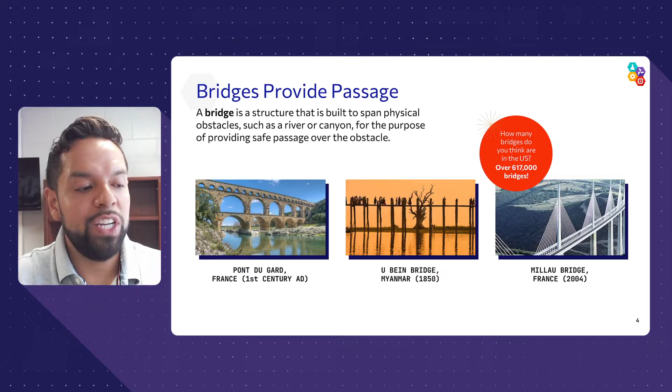Just a quick question, maybe you're thinking or wondering right now: how many bridges do you think there are in the United States? 50, 500, 500,000, a million? How many do you think? If you guess somewhere in the 600,000 range, you would be correct. This is positive for those of you that are planning to be civil or mechanical engineers, because there will always be a job for you.

All of these bridges in the United States have a lifespan, which means that they have to be inspected, they have to be maintained, or they have to be rebuilt.

As I mentioned to you at the beginning, a bridge is much more than a structure. For centuries, communities have been building bridges to make connections that increase opportunity. Rural isolation is still a root cause of poverty today. In some communities, people are cut off from year-round access to education, healthcare, and markets due to the inability to safely traverse some of these rivers or canyons.

So how important are these bridges really? Well, they're so important that in some studies of communities, those with access to bridges earn 30% higher incomes as a result of the increased access to jobs, education, and medicine.

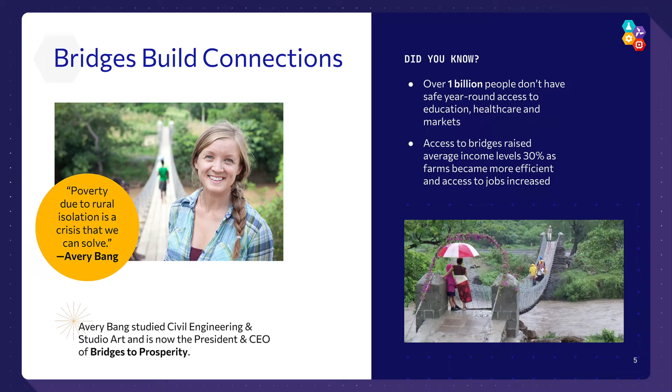One engineer dedicated to solving the problem of rural isolation is Avery Bang. Avery knew she wanted to be an engineer when she was a kid playing with Legos. She went on to study civil engineering and began volunteering building bridges in rural communities when she was in college. She is now the president and CEO of that organization, Bridges to Prosperity.

These bridges are really intricate, but they can be taken and transported. You can take them to different places, roll them out, and provide safe passage for people who've been stranded in the middle of a disaster zone.

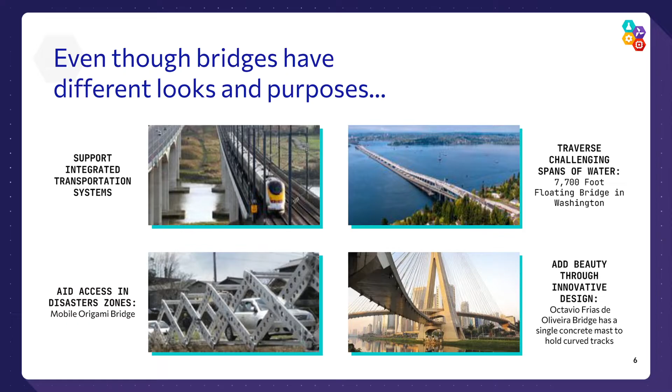Finally, building bridges contributes to the joy of living, regarded almost as much as works of art as they aid in transportation. Care in their design can contribute to a more enjoyable urban environment. Bridges will change the landscape of a city skyline. Here in New York, we just recently had the Kosciuszko Bridge put in, and it totally changes what Brooklyn looks like. So think about that as you're designing your bridge - you may wish that your design is really pleasing to the eye.

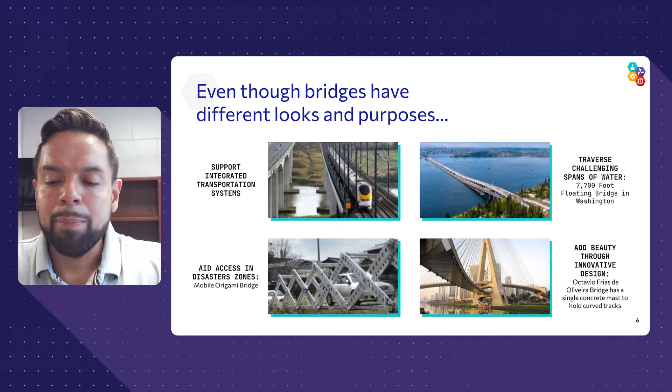Moving on, let's talk a little bit about the fundamentals of bridges. Even though they're all different, it's the interplay between compressive forces and tensile forces. In order to build bridges that will be able to carry the required loads without collapsing, it is important to understand something about stress, strain, and the strength of materials.

Stress is a measurement of force over an area. Compression occurs when something is being squeezed together, while tension occurs when something is being pulled apart. Bridge designers must model the stresses that exist throughout the structure under the most severe conditions, including the heaviest loads and the wildest weather conditions.

Strain is a measurement of how an object reacts to stress. In order to create safe designs, engineers use their understanding of forces, stress, strain, and material properties, including the amount of stress a material can take without permanently deforming or breaking.

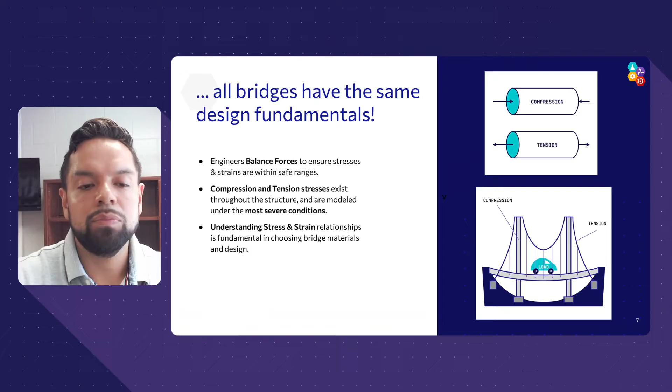There are many bridge designs. Some of them are more popular than others. Virtually all of them work by balancing compressive forces in some places with tensile forces elsewhere. Architects and engineers from the mechanical, civil, structural, and material engineering disciplines work together to choose the design and materials based on a number of constraints, including bridge function and budget.

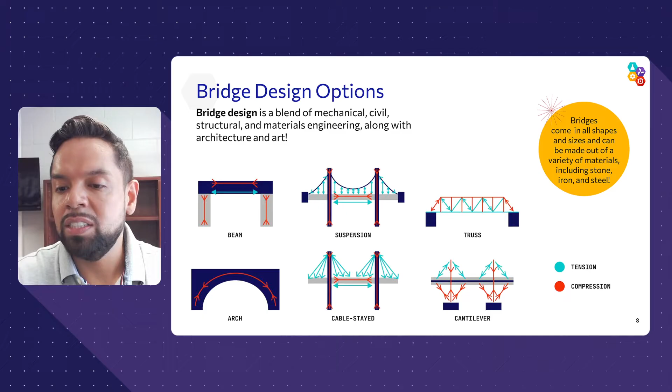I do want to show you something about this. If you notice on this slide, you see a whole bunch of different bridges and different colors. I'd like you to notice that blue is where the tensile forces exist in some of these bridges, and red is where the compressive forces exist.

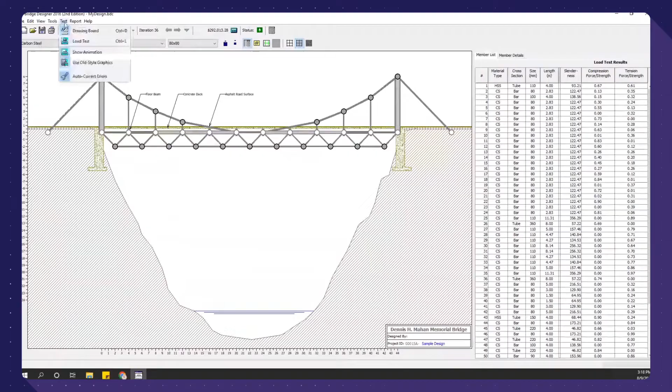I want to show you something I usually use with my students about bridges. You can see here an actual bridge, a sample of a suspension bridge. What you'll notice is that there are two abutments here, and each one of these members carries some kind of load. I'm going to run a test on it to see how it would do during loading. I'll start here and pause it first.

What you see before the truck actually passes is that some of these members already have taken different colors - again, blue means tension, red means compression. The reason why that happens is because the bridge is made up of material, so it already has a dead load to it; it has to support its own weight.

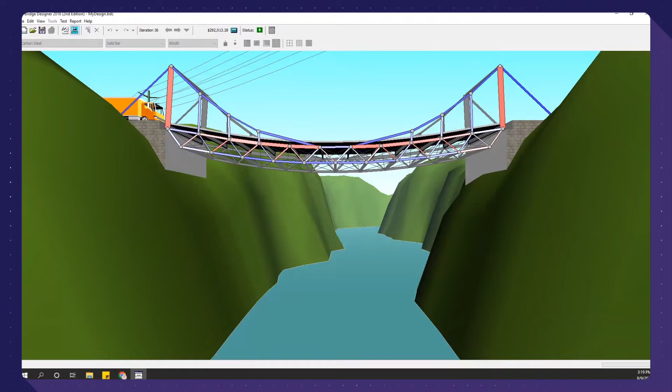Notice that these colors will get darker as the truck passes right over it. You can see all of the stresses on each of those members and how they concentrate as you get an actual load going across it. That load is called a live load.

Engineers work with different types of loads: dead loads, which is what's required to keep the building up by itself, and live loads, which include the crossing of any objects as well as environmental factors. Think about seismic loads with earthquakes, or resonant loads with wind. Wind shear will cause a bridge to move, so all of those things have to be designed for.

All right, maybe you've had a chance to think about it. Let's test it again, so you can see the bridge, and you can immediately see some of its deformity from its own dead load. Some of these members get pinkish red - those are the pieces being compressed, and the blue ones are being pulled apart, or in tension.

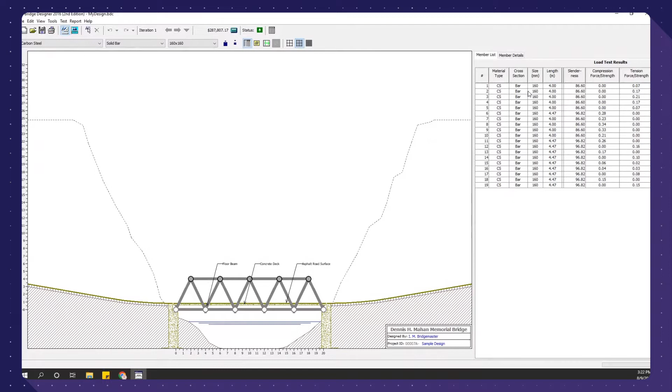Now the other thing you'll notice is that each of these members on the right are made of different materials. We're going to talk about material, but also about the shape of the material, which is really important in understanding how a bridge carries its load. Later in this presentation I'll show you three equations, and you'll understand that each of these is really important - the cross section, the size, the shape of the bar, and also the length.

We'll talk about length because it's very important. Just think about what would happen if one of these members were really, really long instead of a short member. Do you expect that to be stiff, or do you expect that to be flimsy? Something to think about as you go around designing your bridge.

I want to change, just for fun - I've never really done this. Let's see if we could change one of these members. I'm going to change this member you see here. I can probably change its material - let's say right now this is a solid carbon steel bar. If I want to change it, I can make it bigger or smaller. I'm exaggerating the change here because I want you to notice the difference. Now let's test it.

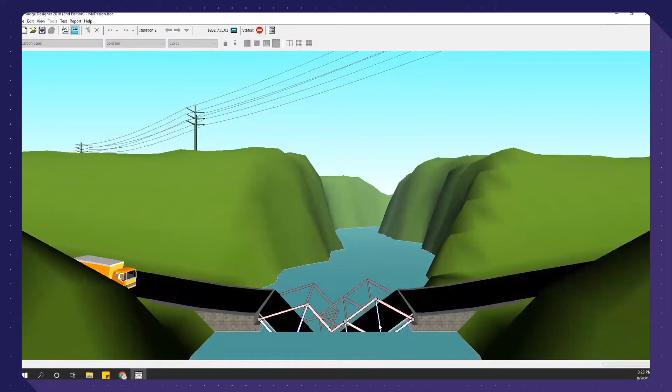As we test it, you'll see immediately that one fails, because we chose a member that was too tiny. Now, why would you want to choose a very flimsy member? Because you want to save money. As I said at the beginning, bridges cost something, so if there's no money in the budget, you may try to take shortcuts. Sometimes they work, but as an engineer you have to know which shortcuts you can and cannot take. This would be unacceptable - this bridge is not functioning.

Let's see if we can fix it - that's my second iteration. Let's go back to the drawing board and change that member again. Notice it has hatches over it now, which just means it's not good. So let's make it a little thicker, say 80 by 80. Notice it's still significantly smaller than the members around it. Let's test that - let's see if it passes. Again, you see it does not work. So back to the drawing board - let's pick something closer to its original size.

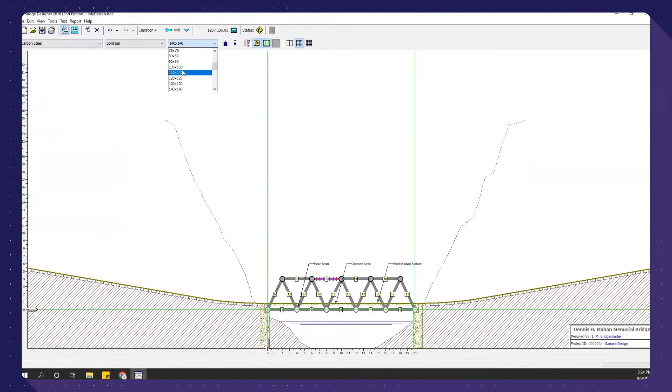Let's do 110, I want to test it again. Here we go. Now you can see that member is being stressed. Hopefully it will take this live load, but it actually does not pass.

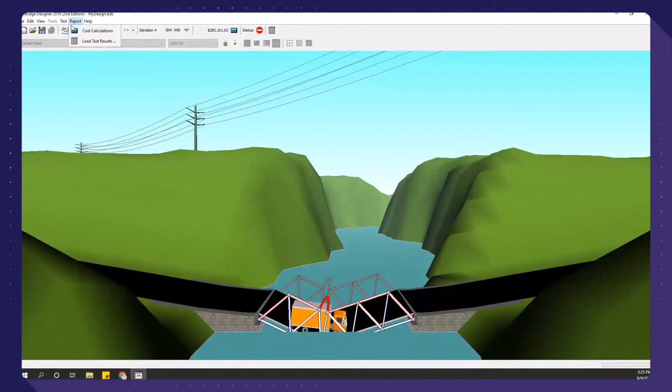This would be a bad thing, not a good thing. Let's try a different number. Let's make this 120, just going up incrementally.

Again, dead load. You can see that member is being stressed. Here comes the live load. Will it pass? Maybe, maybe not. In this case, it actually does pass.

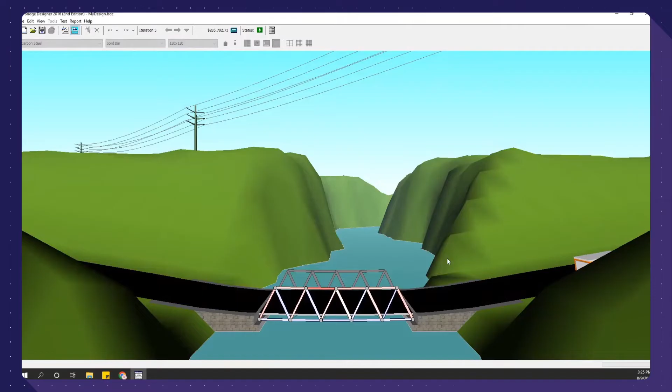If you were in that truck, you'd probably not be happy because that bridge is really moving. This is a case where the bridge is serviceable, meaning it does what it's supposed to do, but people aren't going to want to go on it because they don't feel safe. So even though your bridge is serviceable and functions, sometimes you want to make sure it's strong enough so people feel comfortable on it.

If you've ever stood in the middle of a bridge while walking over it, you'll feel the vibrations. All structures have to move. If structures don't move, they break. Think of something very brittle - it doesn't have a lot of flex, so as you try to bend it, it'll just snap. That's something you don't want.

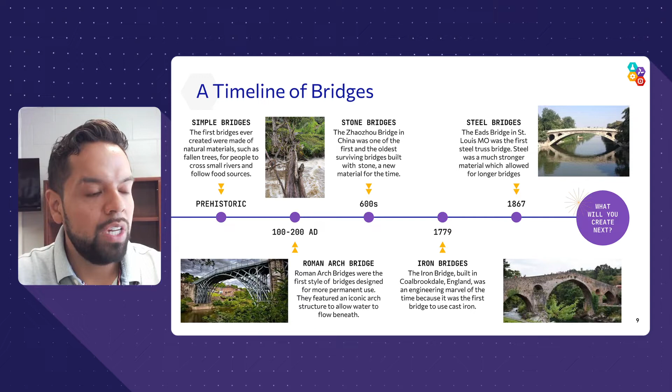What material? Well, steel. Steel was lighter, steel was stronger, and so it allowed us to make really, really large, long bridges. Think of the San Francisco Golden Gate Bridge - that has a lot of steel in it. All of these bridges made with steel are able to span longer canyons, rivers, obstacles, and so steel became the material for bridges.

So what will you create next? Let's think about that. A quick recap of everything we've spoken about today: bridge designs depend on function, location, material, and budget. Bridges work by balancing compressive and tensile forces, and bridges are designed and built using the engineering design process.

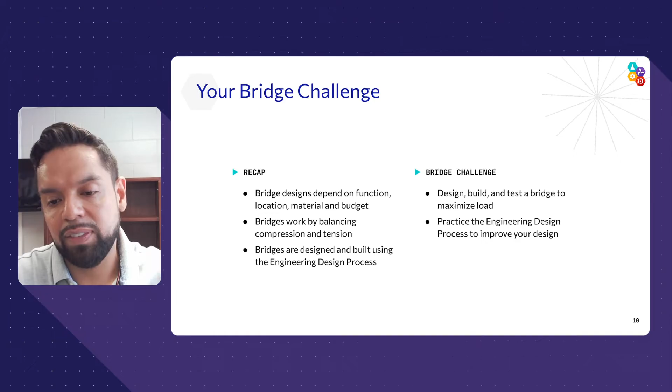Today's bridge challenge will ask you to design, build, and test a bridge to maximize load and do it cost effectively. And you'll get to practice the engineering design process to improve your design.

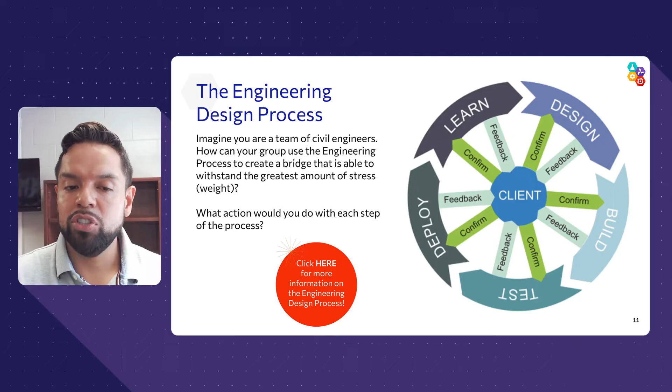Some of you may be asking, what is this engineering design process? It's an iterative process where you do something over and over again. You start by learning, creating a design, building it, testing it, making changes based on your testing, and then deploying it and doing it over and over again. Iterations - almost like what I was doing with the bridge designer. It took me several iterations, changed it a couple of times.

So what we want you to do today is imagine you're a team of civil engineers, and we want your group to use the engineering process to create a bridge that is able to withstand the greatest amount of stress and weight.

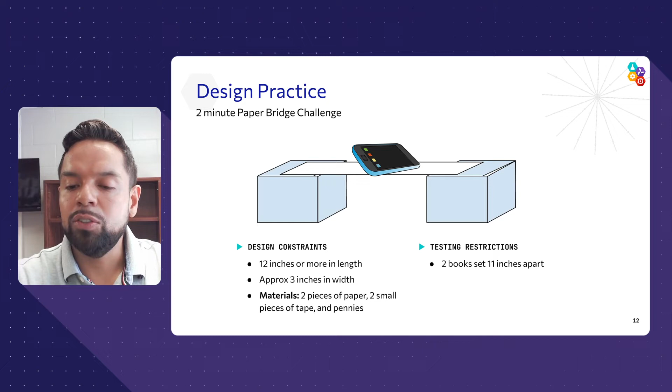We're going to take 2 minutes for you to practice a little bit. Take out a piece of paper, 12 inches or more in length, approximately 3 inches wide, and make a simple bridge. Your constraints are very simple: maybe 2 pieces of paper, no more, 2 small pieces of tape, maybe some pennies so you can load up on it. In my example, I've loaded up an iPhone, but that's not what we want - throw some pennies in there. Make sure that you're testing your bridge by putting 2 books underneath it that are 11 inches apart.

Think about what shape you want your piece of paper to be. Is it ideal for it to be flat? Do you want it to have some other shape? Should I roll it? Think about different things you can do to that piece of paper to fortify it, make it stronger - change its shape. Because as you remember, shape is important for each of these members.

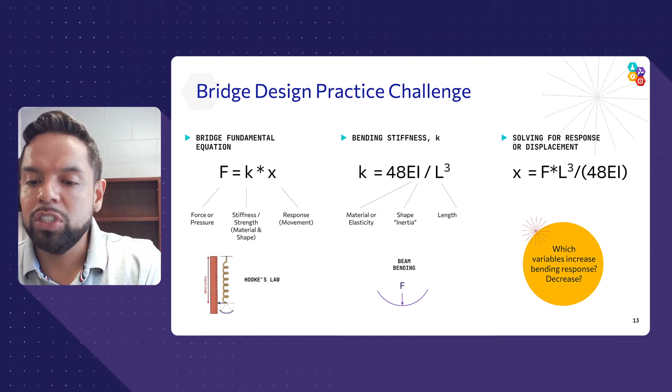So length also plays a role in this. If I put it together and solve for X, all I did was take this K, this huge equation, and plug it right in there. I think what everyone needs to notice is that in this last equation, the deflection is directly proportional to the length cubed. That means you don't want long members, because when you increase the length, there's a cube factor, and that's going to change the deflection.

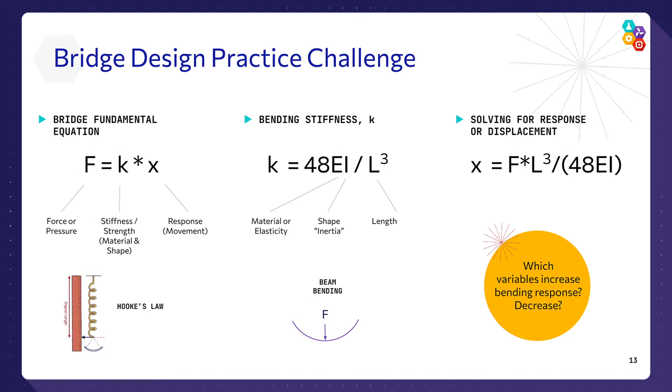That's why you want short members. You don't need to know this equation exactly, just think about the piece of paper you used before. If you had it long, it's flimsy, but if you shorten it, it has a little bit more stiffness in it. Something to think about.

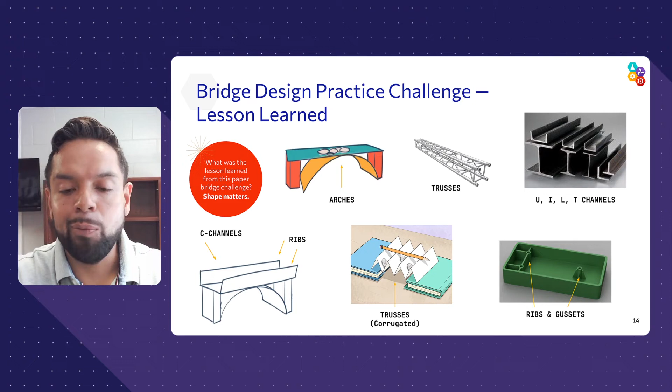As you start to build your bridge from our engineering kit, I want you to think about all of these things because they do come into play. So a little bit of lab overview. What are you doing? Now comes the fun part, the challenge. You're going to identify the problem. What is your problem today? Your problem is that you will be building a cost-effective bridge that can carry a lot of load.

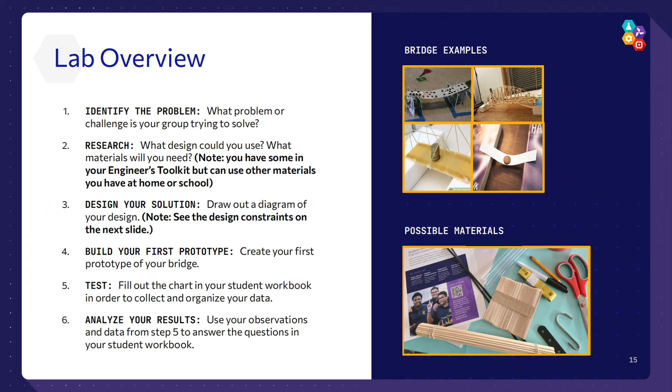Do some research. What design could you use? Should I use a truss? Does it make sense for me to use a suspension bridge? Do I have material for that? Maybe try a cable stayed bridge. Is it easy to just go simple and make a cantilever bridge? What do you think? Think about what materials you will use.

Design your solution, draw it out. The first thing you learn in engineering school, at least in construction management, is that all of the cheap choices are made when you're drawing out your diagram. It's very challenging to change something once you've built it. So draw it out, think about all the different choices you have as you're drawing it out.

Then build your first prototype. Create your first prototype of your bridge. Test it, fill out the chart in your student workbook to collect and organize your data, and then analyze your results. Use your observations and data from step 5 to answer the questions in your student workbook.

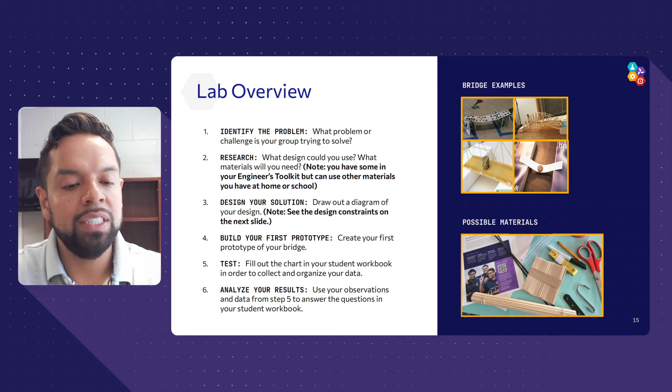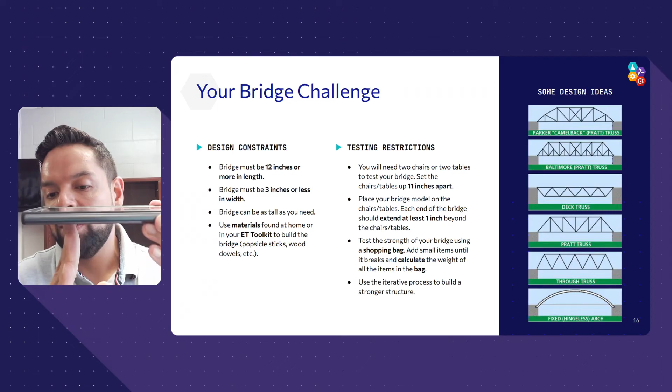If you're putting your bridge out, you want to have a little bit of overhang. That's really, really important. You don't want the bridge to sit right at the end, because then you're not really testing it. Remember, it'll deflect or it'll shorten.

Test the strength of your bridge using a shopping bag. Add small items until it breaks and calculate the weight of all the items in the bag. Use the iterative process to build a stronger structure.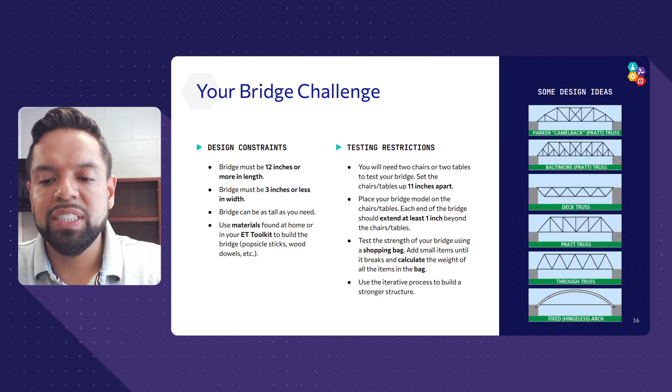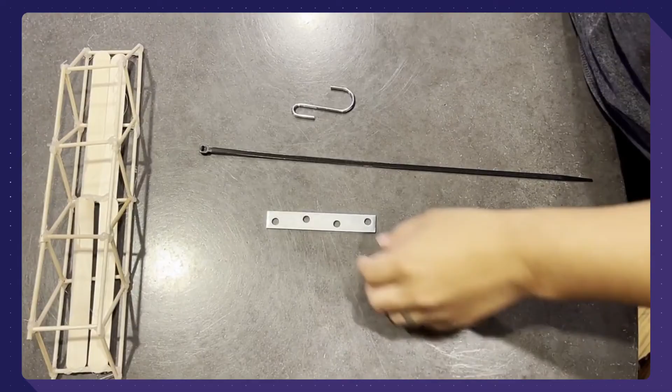What we have here is a video of someone testing your prototype. So what you'll see here, is an example — what kind of bridge is that? Hopefully you said truss. It's a truss bridge with a road deck.

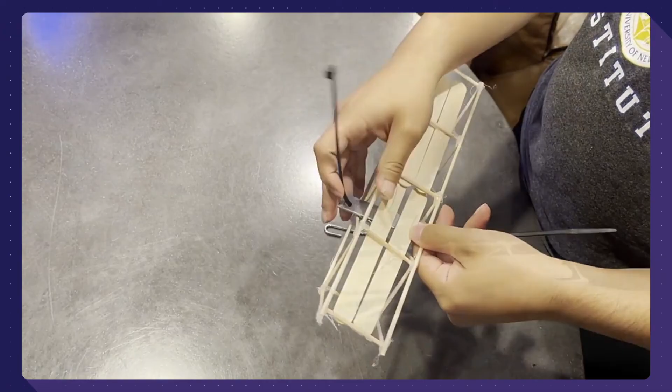Glancing at it, it looks like it meets the criteria: 12 inches long, 3 inches wide. That looks about right. What you have here is he is using a cable tie and a piece of metal to create a testing apparatus.

Now, where does it make sense to test this bridge? Right at the middle, that's where you want to test it, because that's where you want the most load. Think about why you wouldn't test it anywhere else. You want to load it in the middle because that's probably where you'll have the most unbraced length.

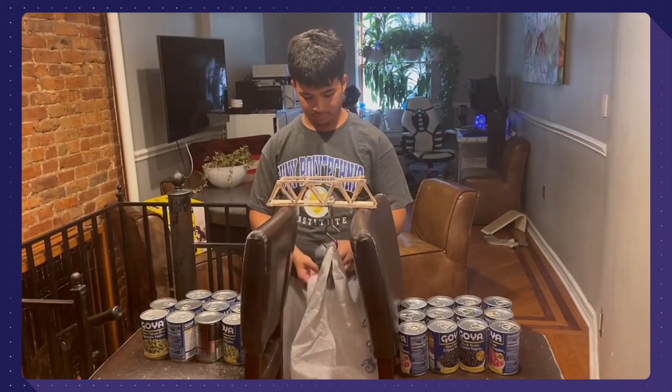And here he goes, he's loading it using cans, with a shopping bag attached to it. As you load your bridge, you want to start to see how it behaves.

Your bridge is going to start doing a couple of things. Like all structures, it's going to start to change shape, deflect. But it also starts to make sound. All structures make sound, and sometimes that's worrisome.

Think about the sounds you're hearing, because you hear some cracking, some creaking. Think about why that's happening, and then really pay attention to how the bridge will fail.

I know for some of you, you spent a really long time making this bridge and you don't want to break it, but that's the fun part. You have to break it, so continue to do it until it breaks.

Then figure out why it broke there. Was it a connection issue? Was it a member issue? And think about ways of making it stronger, fortifying it.

Let's say you and one of your schoolmates made the same bridge. Who made it cheaper? In real life, that's what's going to happen. If you put in a bid for a project, most of the time they will choose the cheaper bid. So in this case, you want to be as cheap as possible.

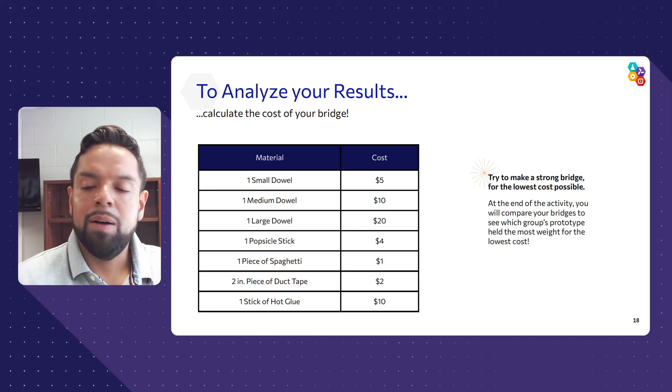At the end of the activity, you'll be able to compare your bridges to see which group's prototype held the most weight for the lowest cost. All right, so that is the challenge for today.

Okay, let us review a little bit. We spoke about bridges and why they're important to society. We understand now that bridges help people who are in rural areas by giving them access to education, jobs, and medicine.

We spoke about how important bridges are when being designed, and how important understanding compressive and tensile forces are. You have many different types of bridges you can make. Do your research and see which one is your favorite.

We spoke a little bit about the engineering process, how it's an iterative process that you do over and over again. That's basically what you're going to be doing here.

Okay, and then you have your challenge. You're making a bridge, you're going to load it, and you're trying to make it as cheap as possible. I wish you well. May your bridges be strong and the cost be cheap.

If you wish to continue to explore, if you liked today's breakout, you may be interested in topics like bridge design, tunnel design, construction materials, and lattice work in buildings. The types of engineers relevant to today's bridge lab are civil engineers, environmental engineers, architectural engineers, materials engineers, and mechanical engineers.